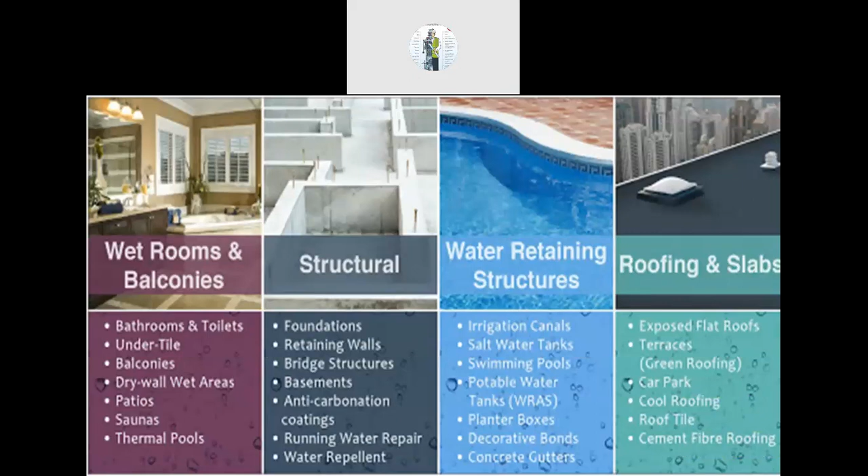Now, the first thing we need to know is what is waterproofing? Waterproofing is nothing but protecting the concrete or a building against the damaging action of water. Virtually any building envelope, particularly a below grade structure or a plaza, would encounter hydrostatic pressure from water during its lifetime. Therefore, a quality waterproofing system is very much essential to preserve the water tightness of the building envelope. Like Mr. Ashok Kumar has rightly told, waterproofing is a very important topic in the construction industry. So we are also talking to people to incorporate such presentations so that our fellow engineers as well as professionals would understand the need for waterproofing of a structure.

So why is water so important? Water is a carrier, the main carrier of corrosive agents. It participates in the chemical reaction. It damages the structure, the facility, and the installation. It also causes functional as well as structural damage to the structure. So yesterday we talked about the various effects of water on repair and rehabilitation.

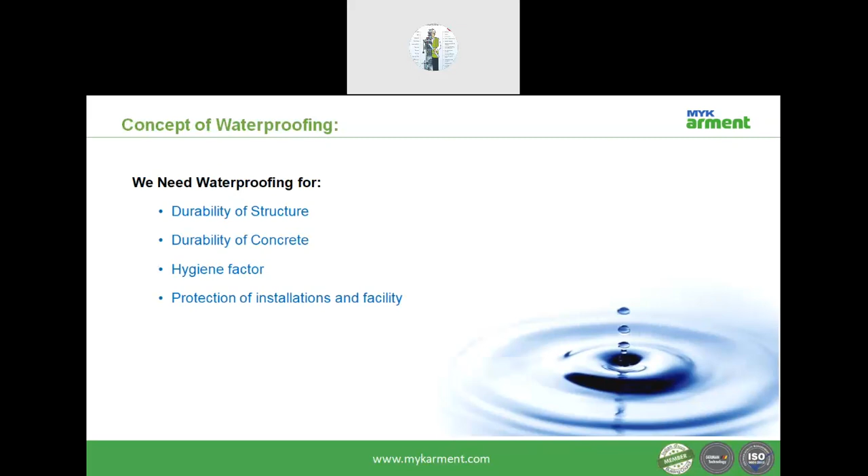What is the concept of waterproofing? Why do we need waterproofing? The need for waterproofing is for the durability of the structure, durability of concrete, hygiene factor, protection of installations and facilities.

So what are the causes? How does water enter into the structure? It is through cracks, through joints, porous media, might be capillaries, honeycombs, pores, and defects in the construction. Now there are different companies who would come to you all and talk about different kinds of products.

What is waterproofing? As we already know, it is a tendency of the material that keeps water away from the body under hydrostatic pressure.

Damp proofing is a system that resists water vapor or minor moisture, not subjected to weathering or water pressure. We need to be very clear on which system we are adopting, and that would also lead to catastrophic damage of a structure.

So we need to know a proper difference in the terminology of different kinds of waterproofing systems, and what system we are adopting in our project.

What are the different types of waterproofing systems based on chemicals? The main waterproofing systems are classified into preformed membranes, that is membrane systems, then liquid applied, and integral waterproofing systems. These waterproofing systems are subclassified into bituminous and non-bituminous, because in the old traditional technology people used to use bituminous based material.

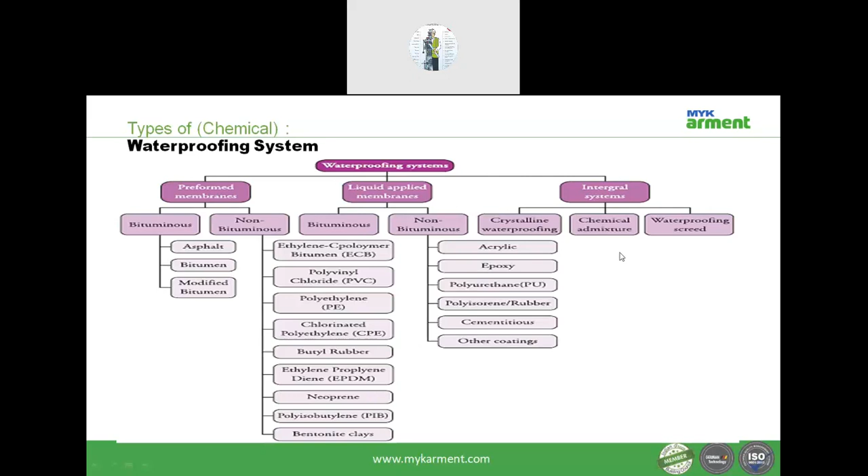Now, based on the chemistry, the waterproofing systems are classified into integral waterproofing, reactive kind of crystalline systems, bituminous based, and elastomeric polymer based waterproofing systems.

In today's presentation or webinar, I would talk about polyurethanes, polyurea, and hybrid polyurethanes, and I would also touch on preformed membranes with an HDPE membrane system.

Based on the chemistry, the waterproofing systems are also classified into bituminous, as I've already told. But what is the definition? People call it an APP or an SBS or a TPO based system, or an EPDM or MMA.

APP depends upon the chemistry. APP is nothing but atactic polypropylene. SBS is nothing but styrene butadiene styrene, TPO is thermoplastic olefin, EPDM is ethylene propylene diene monomer, and MMA is methyl methacrylate.

Depending upon the application systems, the waterproofing systems are also classified into brush applied, roller applied, and spray applied. Almost all of our cementitious based systems, as well as PU and polyurea based systems, also come under the brush, roller, and spray applied systems.

The hot weld kind of system is your APP, that is a tar felt system, and heat applied is a new technological trend in preformed membranes.

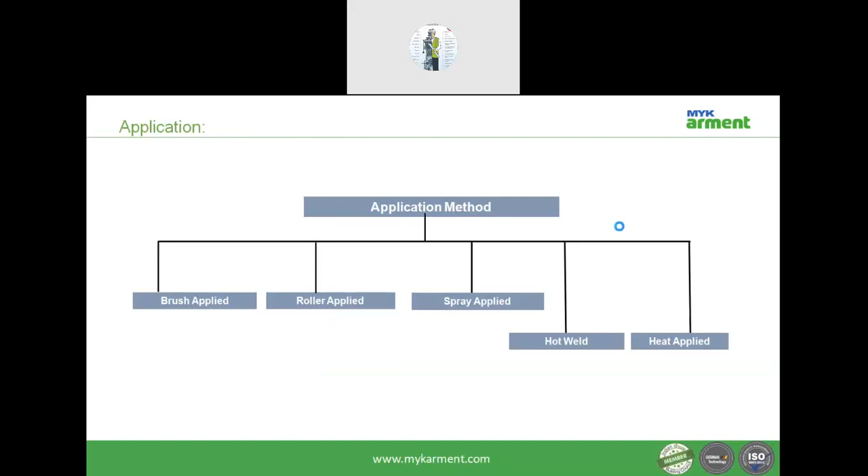So now if we talk about investment versus criticality, if you take the investment for any building, the total investment for waterproofing out of the total civil work investment is nothing but 0.6% of the total investment.

But the criticality of waterproofing, or the risk management associated with it, is tied to long-term maintenance cost. If you neglect this 0.6%, then the cost incurred for repair without a proper waterproofing system is approximately 20% of the total investment value. That is a very high value.

Therefore, a reliable waterproofing system is a must for overall project success.

I like this picture very well, because most of the time when we go to customers or to engineers in the contracts, costing, and estimate department, they always tell us that there would be somebody who does it cheaper. But that cheaper option would come at what cost?

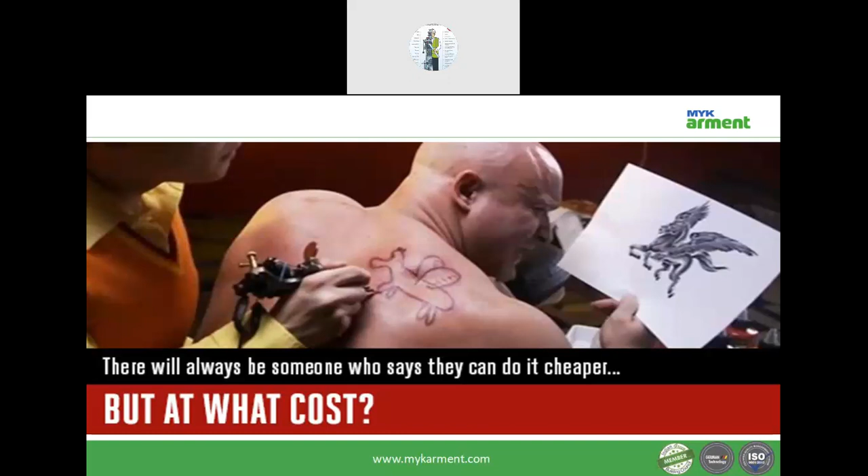That is what we need to know, and that is why it is very important to choose the right waterproofing system, which we will talk about in my next slides.

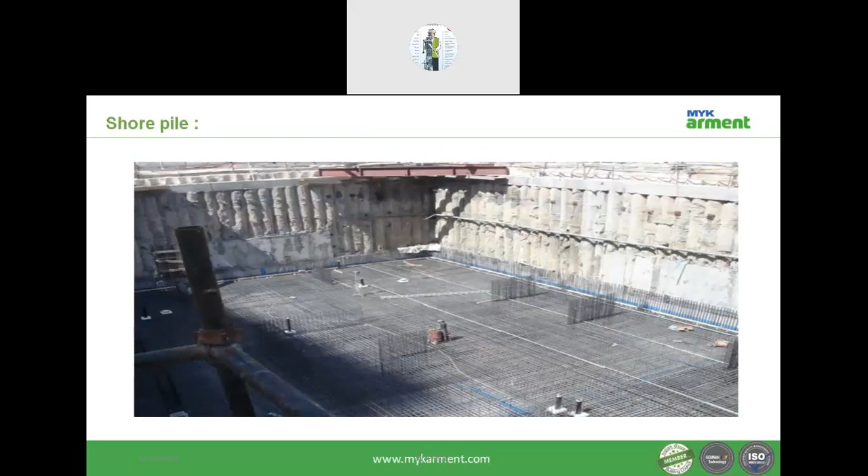Audible, yeah. It is an isolated foundation structure. Then we have the shore pile structure. We are showing all these different pictures of the foundation to make you understand the different kinds of foundation structures, because there is a need for different kinds of waterproofing intervention and systems to be carried out. So this is with a D-wall and a pile foundation structure.

And then for the retaining wall structure, also they require a different kind of waterproofing system. And with the basement and the rock anchor, where the water pressure is very high, in those areas we would talk about how to select a waterproofing system and what is the right system to be selected to prevent any water seepage in the basement.

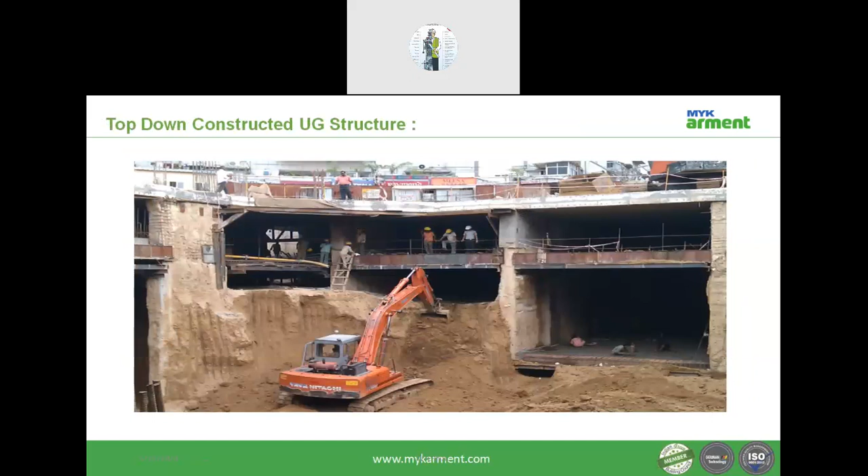And for a cut and cover structure, also the intervention of the waterproofing systems is much more different, even for the top-down constructed underground structures. We would talk about the basement structures, that is, we would talk on problems and defects, and we would talk about selection criteria and solutions, and on the best practices as well as the case studies.

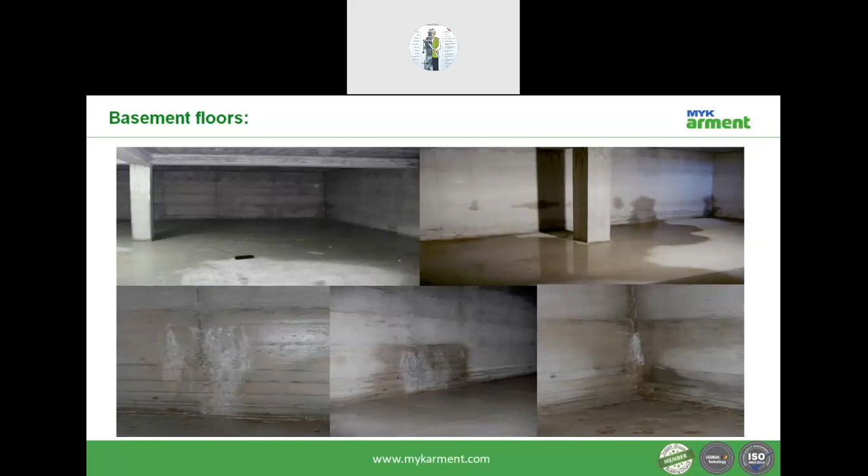So this is a basement, you see, in the retaining wall, because this is one of the projects where incidentally I have been in to give a solution to the customer. We already told the customer that there is a nearby water source, so you need a very good waterproofing solution for that, and there is a heavy chance that the groundwater would increase. But the customer did not hear us, and now he is spending more on the repair cost than the waterproofing cost he had paid.

And I want to know from the audience, is injection or pressure grouting a problem or a solution? You can even send a chat. Is pressure grouting a problem or a solution? Anybody? Yes, pressure grouting is a solution if you need it, it is a solution.

I could see somebody, Mr. Sandeep, telling that it is a solution. Yes, sometimes it is a solution, because without pressure grouting you cannot stop certain kinds of seepage that is happening. But it is a problem if you go on fixing nozzles at each and every interval, you are damaging the structure. Hence it is a problem. So we need to be very clear when we make this kind of intervention.

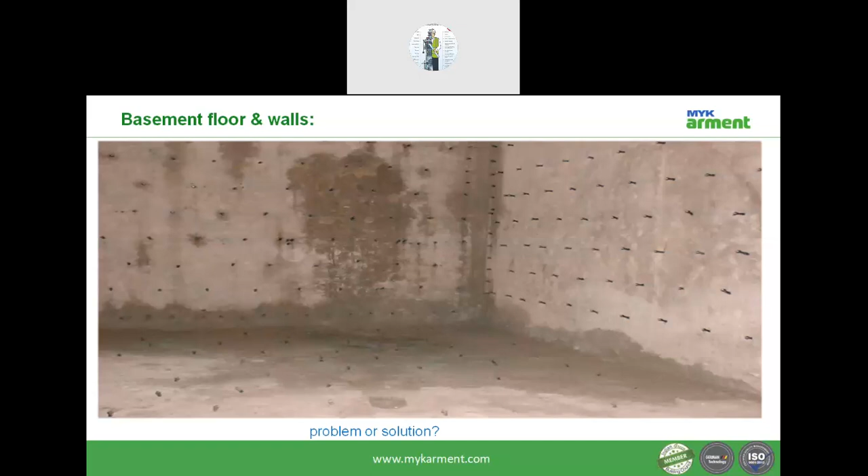Now in a basement, there are certain types of condensation also that take place, or mold. What is condensation? When hot air comes in contact with a cold surface, you have water condensing, that is called condensation, and due to continuous water you have mold formation, and that affects the hygiene and the environment.

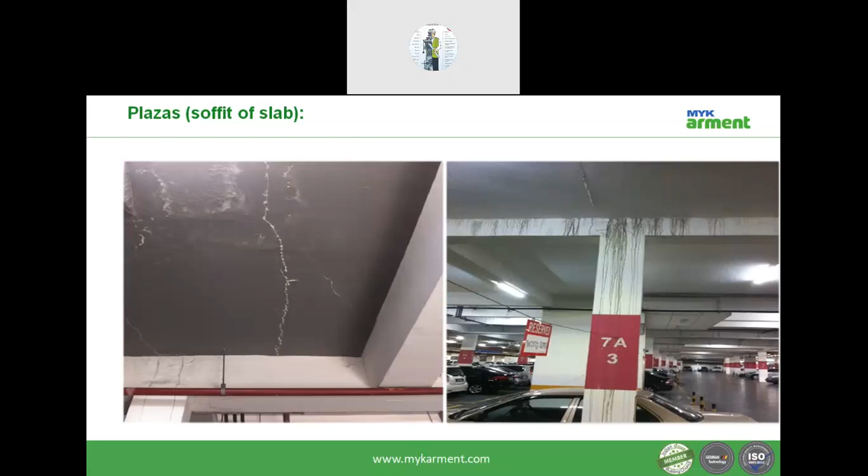This is what happens if you have a costly vehicle - the paint chips off. And in the picture you can see even in the car parking, the car is covered to prevent it from any further damage due to the water seepage.

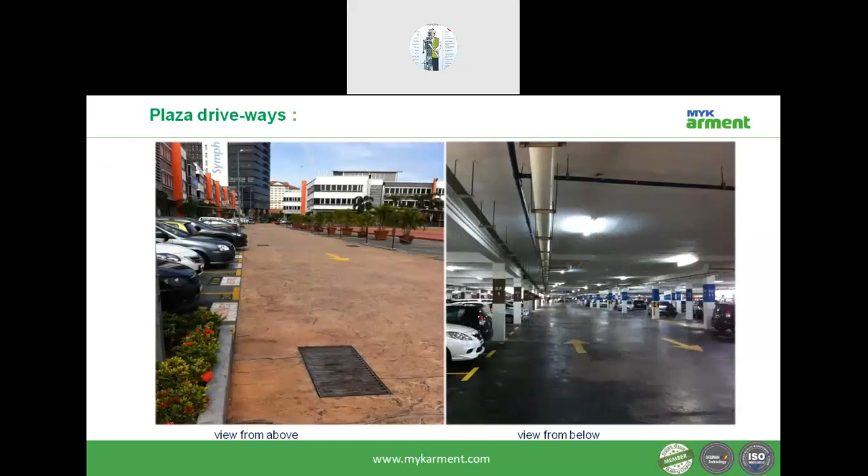Now this is a plaza below. You can see the water seepage, which is also aesthetically unpleasing and creates unhygienic conditions. Even in expansion joints in plazas or driveways, if the expansion joints are not properly done, or the surface waterproofing is not done, then you have an issue of water seeping in, which in turn reduces the lifetime and durability of the structure.

This is a driveway where the expansion joints are not treated, because expansion joints are very, very important - most projects we see find a lot of problems if the expansion joints are not treated properly.

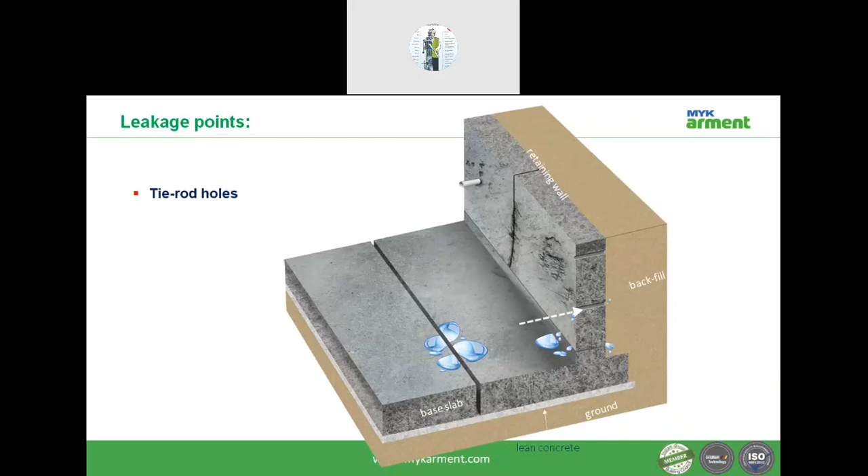What are the leakage points? The leakage points are through the construction joints. The construction joints have to be treated properly, and then you need to take up the expansion joints, which I've already spoken about, and then the tie rod hole fillings. If the tie rod holes are not filled properly, then you have the issue of water seeping in.

Then there are honeycomb areas, voids and cracks, either due to improper compaction, improper mix design, or improper curing - you get all these kinds of effects. Then the pipe penetrations also have to be sealed properly in the retaining wall structure.

And what is the solution? We have repair mortars to fill the voids as well as the infirmities in the concrete. For the joints, we have water bars that swell in the presence of water. For pipe sealants, we have swelling water sealants. For expansion joints, we have sealants and tapes. And we also have mortars for the repair.

Now first we need to understand how we select a waterproofing system for the basement. The waterproofing selection system is based on the water table and the depth of the structure below ground level - that is very, very important. We need to know the water table at that area and the depth of the structure below ground should also be known.

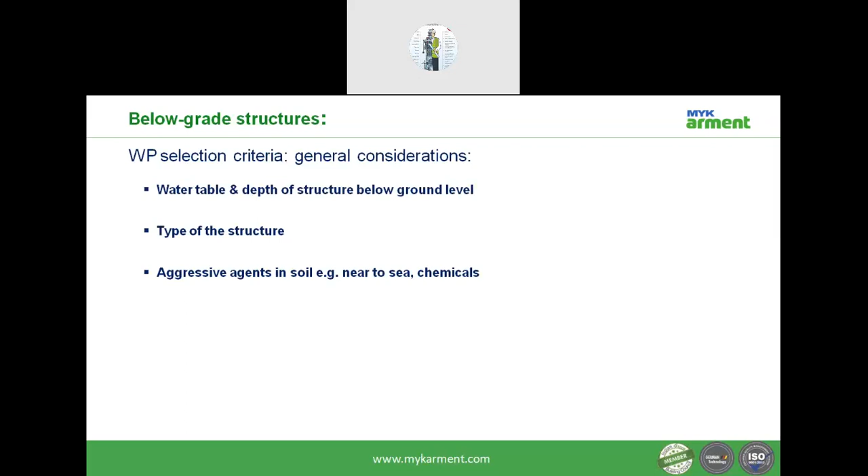Once that is known, you need to know the type of structure, what is the aggressive agent in the soil, whether it is near the sea, or there are chemicals present in the soil, or any pollutant. The waterproofing selection also depends upon the construction method, for example the retaining wall, the contiguous bore pile, or cast-in-situ cut and cover.

It also depends upon the accessibility for installation, because I cannot choose the same waterproofing system for cast-in-situ and precast construction, because in precast construction you have a lot of precast joints between the elements that has to be waterproofed properly, otherwise you have water seepage issues. You also need to choose the waterproofing system based on the ease of installation and the track record in that environmental condition.

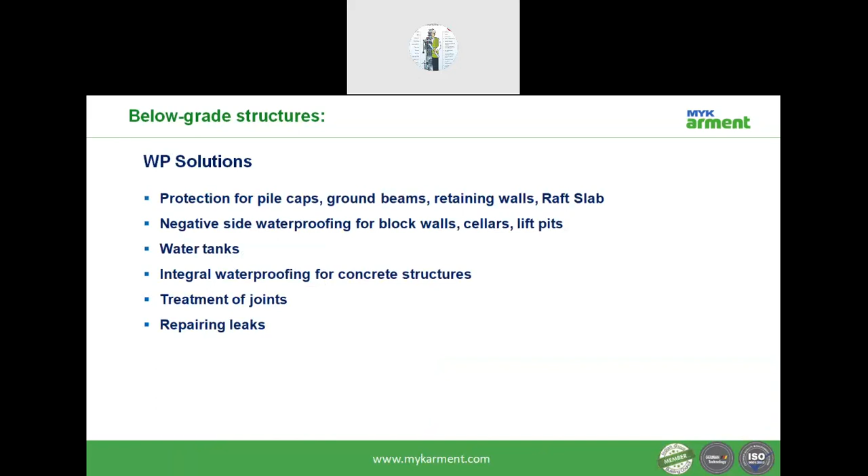So in a below grade structure, what needs to be protected? You need to protect the pile caps, the ground beams, the retaining walls, the raft slab. In negative side waterproofing, we do it for the block walls, the cellars, the lift, the water tank, and integral waterproofing. You also need to treat the joints as well as repair the cracks.

But the question might be, since we are pouring the concrete and the water is present, does the swelling water bar not swell at that time? That might be a question.

This is a PVA based water bar that does not swell immediately, and swelling takes place after 8 hours of continuous contact with water. The swelling capacity is reswellable, and the swelling capacity of this water bar is more than 800%.

I'll just show you a video of a water bar, how it is being placed.

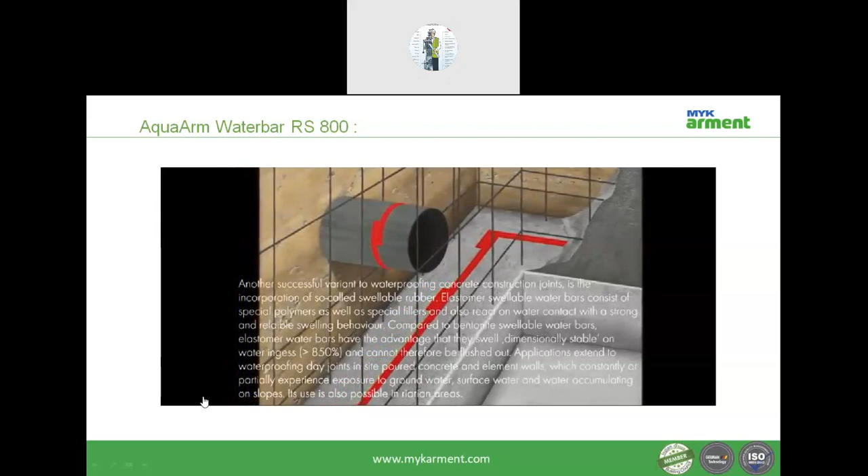The swelling of this water bar takes place in the continuous presence of water. Once the swelling stops when there is no further water present, it is a reswellable water bar. And this is how the water bars can be placed.

It can be placed on the joints using an adhesive, for blunt butt joints and overlapping joints, and even for corner connections.

We also have bentonite based water bars with us, so the principle is the same, but the chemicals here are bentonite based.

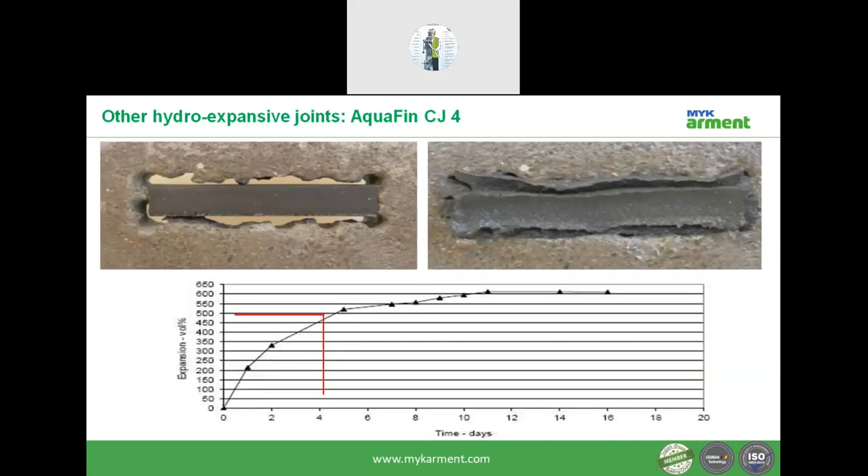You can see how the bentonite based water bar works. This is a small simulation where we have laid a water bar in a joint, and when there is continuous water pressure, it swells from more than its capacity and blocks the water.

If the width of the concrete is more than 300 mm, then you need to use 2 water bars. This has to be avoided: when you place a water bar on a wooden reap or something, in the presence of water it swells and breaks, and then the effect of the water bar would be compromised.

We have a system called AquaArm Power Prufe 800, which we call an HDPE membrane. This kind of HDPE membrane is a high technical product for below grade pre-applied waterproofing systems. It consists of 3 layers: an HDPE backing, the pressure sensitive adhesive, and the trafficable resistant protective coating.

In this kind of system, we can directly lay the concrete on the HDPE based membrane on the compacted PCC, and when the concrete gets bonded to the trafficable protective coating, the pressure sensitive gel gets released, and therefore it resists the lateral flow of water.

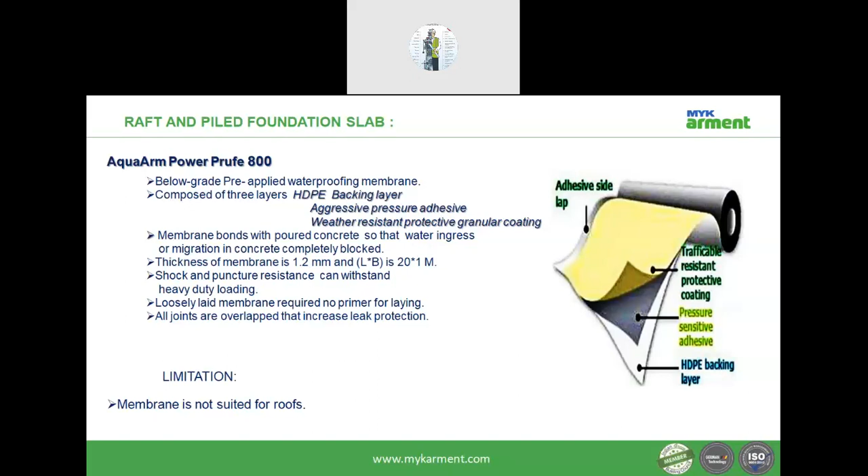The thickness of the membrane varies between 1.2 and 1.5. In other foreign countries, they use only the 1.5 thicker membrane, and this membrane is not suitable for the roof.

I'll just show you a video of how the application of an HDPE membrane takes place.

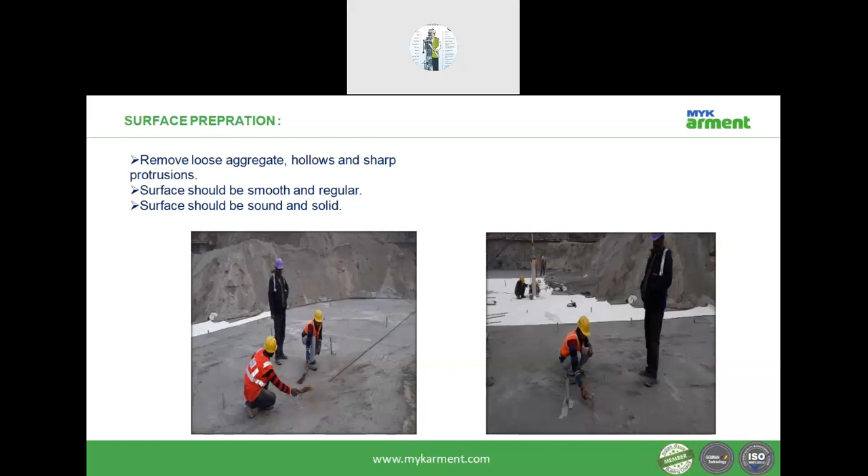This is about the surface preparation. There should be no sharp edges. The surface should be smooth and regular, and it should be sound and solid. Then it is a robust and trafficable material.

Once you lay this HDPE membrane, you can directly leave it exposed for 36 days, and then you can even lay the reinforcement because it has a higher puncture resistant property of more than 880 newtons.

But you need to take care that you don't drag the reinforcement on the HDPE membrane. You can see any kind of uncongested reinforcement can be directly laid.

The advantage with this system is that in other kinds of systems you need to go for a screed concrete for the protection of the waterproofing system, but with an HDPE membrane you can directly lay the raft concrete on top, and this also prevents the lateral flow of water.

It directly bonds to your raft concrete, and this is how the application works for the piles. Since you would be breaking the piles, the surface would not be clear, and the application with an HDPE membrane is very fast and very simple to apply.

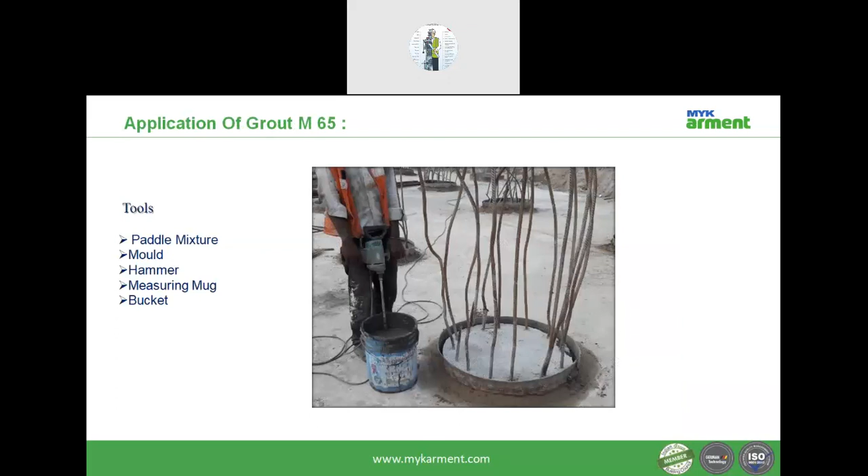Now for the pile top treatment, because the surface would not be proper, we use a micro concrete to make it a proper surface.

Once that is done, we use an epoxy based primer and epoxy grout, because the epoxy grout resists the capillary flow of water.

Then we can even terminate the HDPE membrane at each and every pressure release pipe, and then we can also use a PU based coating as a protection.

These HDPE membranes should be protected on the retaining wall with drain boards or dimple boards against any damage during soil fill. The drain boards also help to guide the water to the drain pipe.

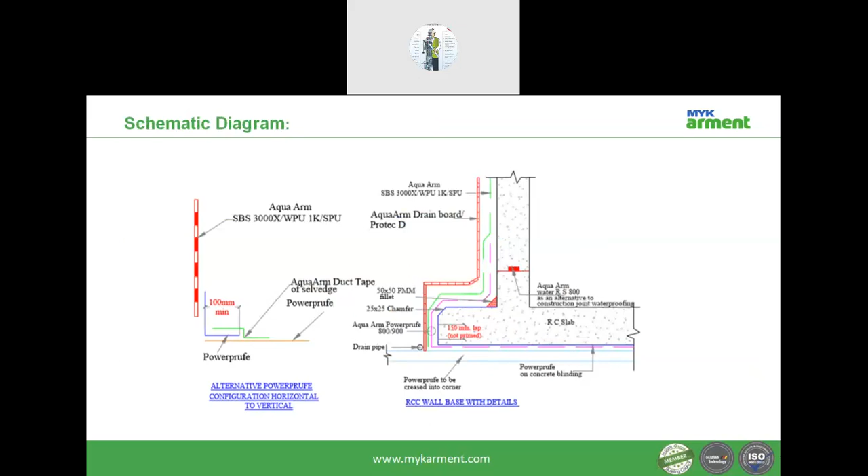Now we would talk about the waterproofing system for internal areas, such as balconies and swimming pools. Here also we talk about the problems and defects, the selection criteria, and the best practices.

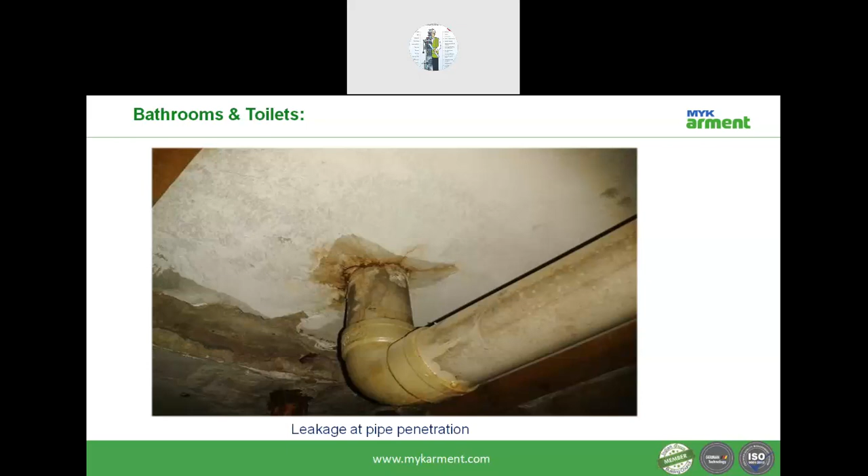This is one of the issues you see in waterproofing of a toilet. What happens is there is a leakage at the pipe penetration if the packing of the pipe is not done properly. This is also another issue you can see in most apartments in Bangalore or other regions across India.

If the waterproofing is not done properly, there is leakage from the bathroom corners because the proper gradient is not placed, so the water gets stagnated at that place. And if you have a bathtub, the improper sealant application or the deterioration of the sealant also causes seepage of water.

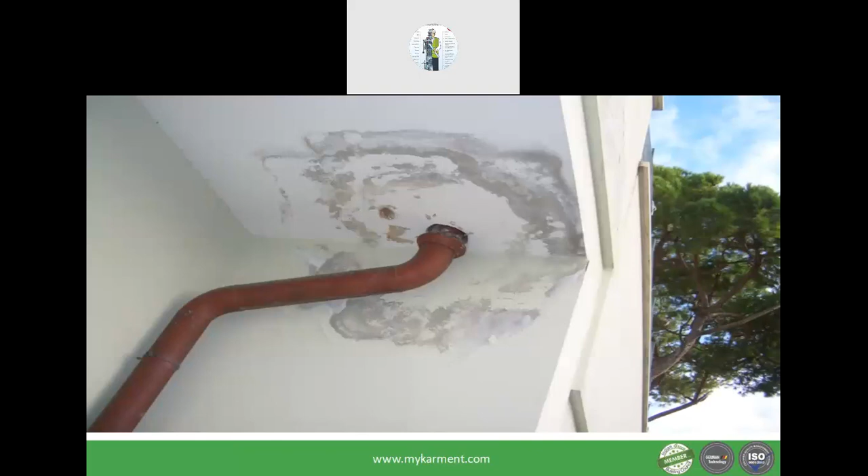This is one of the projects where in the balcony they did not even do any of the packing of the outlet pipes. You can see the water seeping through the outlet pipes.

This is what happens in certain projects where, because of the improper waterproofing system, you can see the moisture coming through, leading to leakage pipes or plumbing issues.

Then if water comes in or trickles down, you can see discoloration on the paint, or the peeling of the paint would take place.

And what is the waterproofing system we need to follow for the toilets or the wet areas? It should be a simple system for a confined area, because on all sides you have the beam as well as the slab, so the movement would be much lesser. You can use a rigid kind of waterproofing system here for toilet areas, as there would be less movement, but it also depends on the type of structure. For example, I cannot use a rigid-based waterproofing system for a precast system, which I'll talk about separately.

The waterproofing should be resistant to penetration of water as per BS standards or ASTM standards, and it should have good adhesion.

In pools and water features, it causes efflorescence in the pool, but in the bathroom and toilets we need to be very clear that we need to pre-wet the substrate, especially walls. Joint treatment has to be done for all construction joints, and the pipes and penetrations need to be taken care of.

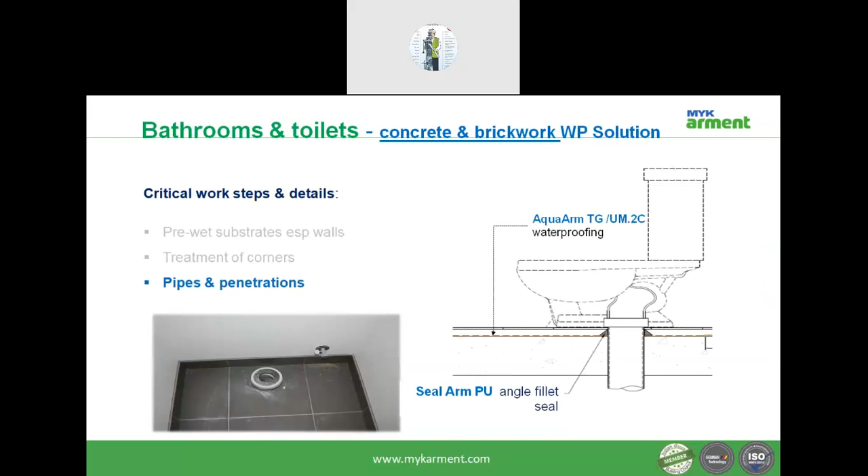So you can use a cementitious or sometimes a polyurethane-based waterproofing system. This is a system built up using a cementitious-based waterproofing system. For all joints you need to use a tape instead of going for a coving or haunch at the joint. Then you apply the cementitious-based system and directly the tile adhesive and tiling if it's a flat slab. If it's a sunken slab, you need to protect the waterproof coating with plaster, then fill up the sunken areas with cinder or screed, and then go for tiling.

So for swimming pool purposes, I will talk about that in the swimming pool section.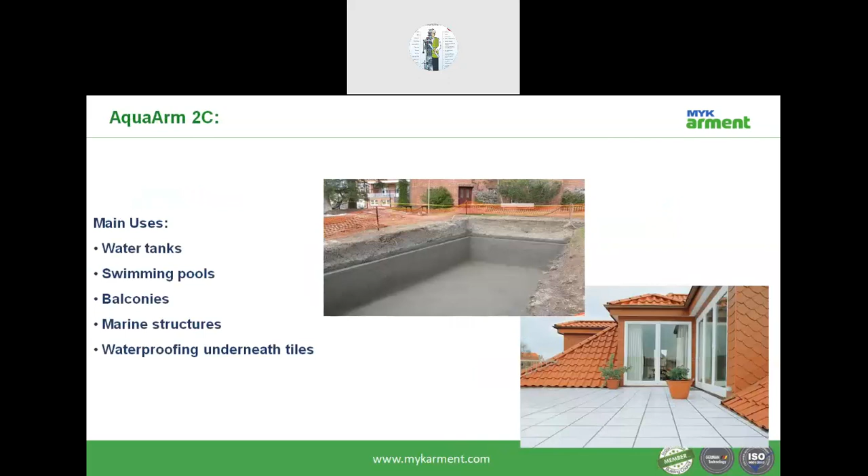Now we have a product called 2C, which is a cementitious-based system that has high elongation properties and can withstand hydrostatic pressure. This is a cementitious system which I can use for water tanks, swimming pools, balconies, marine structures, and waterproofing under tile.

Now we have a product called Aqua Arm Saniflex, which is a synthetic resin-based dispersion, a single component system that can be applied on plaster or gypsum board, or even on marine plywood, with a thixotropic consistency, and on existing ceramic tiles, natural stones, cement, untreated wood, and magnesite substrates.

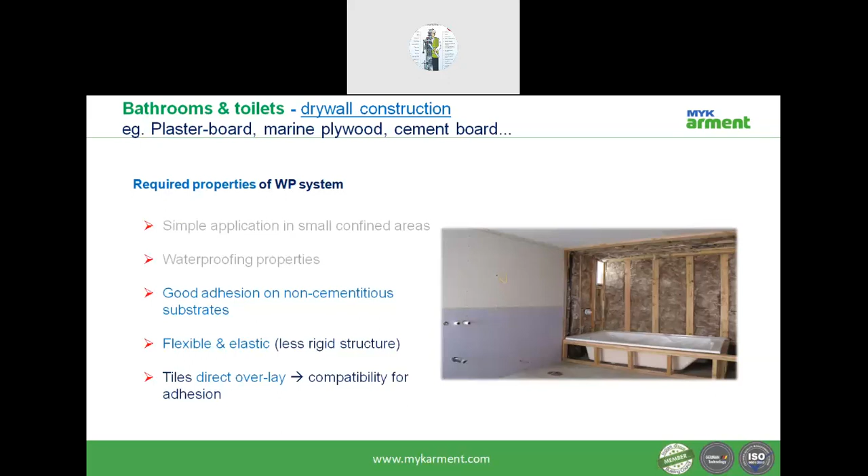In hotel industries, they often go for plaster boards or gypsum boards as partition boards. For that kind of system, the waterproofing system we need should be very simple. It should have good adhesion on non-cementitious substrates also, and it should be flexible and elastic with less rigidity, so we can directly lay the tile on the surface.

The product we have, Saniflex, has more than 114% elongation, and this is how the application takes place. First we need to clean the surface, then apply a single component primer, then all joints have to be treated with joint tape, and then we apply the synthetic resin-based coating, with the tapes embedded in the synthetic resin-based system.

Where the construction process would be much faster in the precast system. Yes, then this is about the Aqua Arms.

You can share the earlier slide. Regarding the pod, people may not know what a pod is, so if you explain it a little, they will understand. A pod is a precast element. These precast elements are fixed in the factory itself, and then they bring it to the site and install it there. This is precast, but the pod is nothing but a precast toilet or bathroom kind of structure.

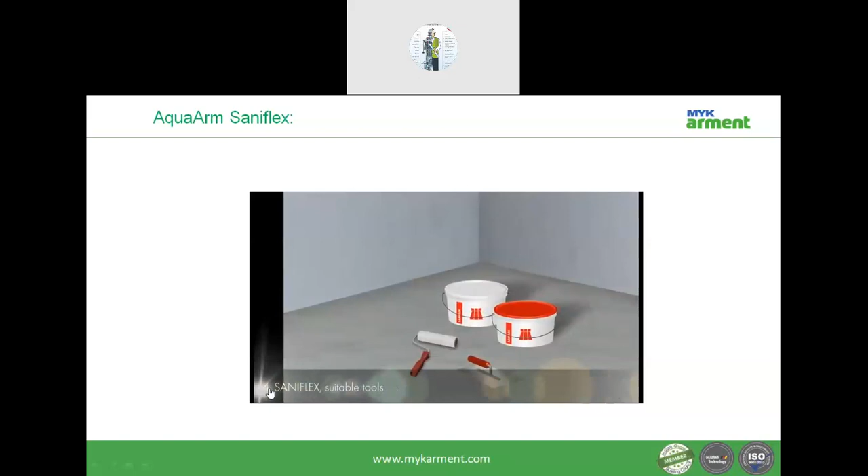This is a video about the AquaArm Saniflex. Their application using Aqua Arms Saniflex is much faster, and you can directly lay the tile on top of this waterproofing single component material.

This is a joint tape. In all construction projects of waterproofing, people use coving at the joint. But what happens is, when the coving is done and the waterproofing is totally completed, the tile layer comes and tries to fix the tile with a proper level. When he does not get a proper level, for example if the coving is something like 50mm and there is no proper level, he chips that joint and lays the tile. Once the customer occupies the building and starts using the available resources, there is a high chance of water seepage, which leads to repair, and the repair cost would be much higher.

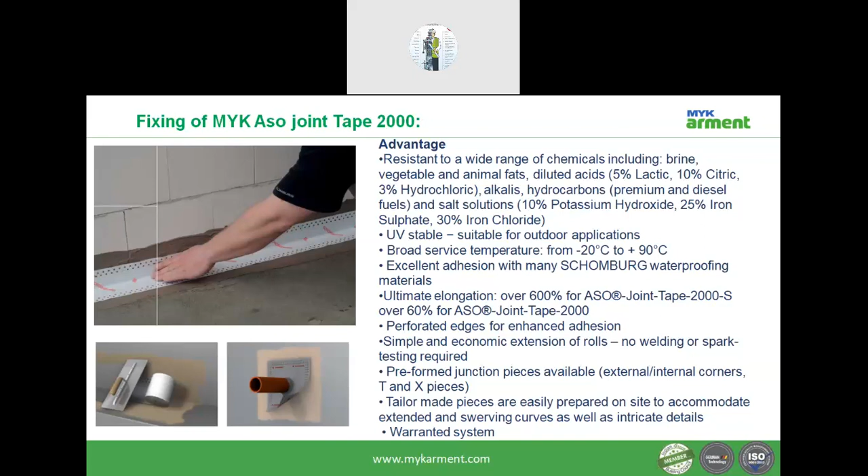To overcome that, we have a joint tape. This joint tape has an ultimate elongation of more than 600%, and a high tensile strength of more than 3 newtons per millimeter square. These kinds of tapes are also used for preformed junctions, and it is a tailor-made piece that is easily prepared on site to accommodate extended and swerving curves, as well as intricate details. So this is what the tape sizes are, and we can cut and design it for any change of direction.

This is the application of the tape on the retaining wall. This kind of tape can be embedded with the cementitious or the single component resinous based coating system. Then we have below grade structural tapes.

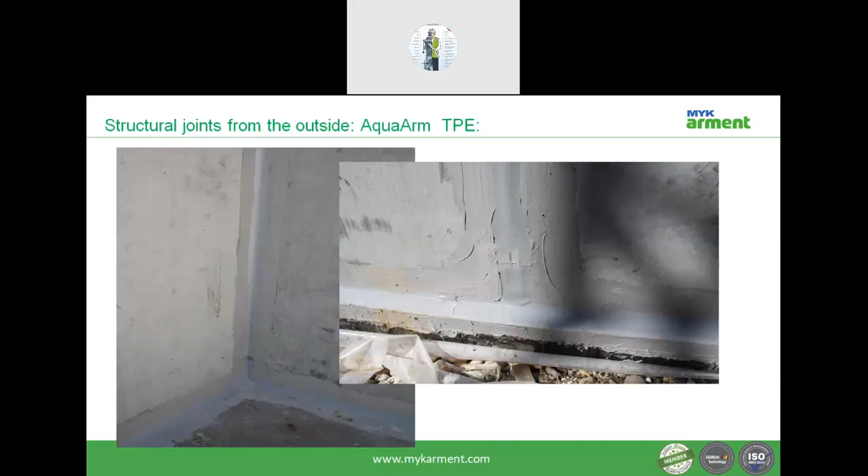That is a joint tape, called an elastomeric thermoplastic olefin based tape, used for basement and tunneling works, and for hydraulic structures and water. This tape has a higher elongation of greater than 650%. These kinds of tapes are used at structural joints, and even in precast segment joints of a particular length, we use this tape. So this tape prevents the entry of water. This tape is chemical resistant, it is also root resistant, and it has higher puncture resistant properties.

The same tapes have been used for expansion joint works also. This is one project where the size of the expansion joint was more than 150mm, so we have a tape of 1 meter by 20 meters that can be used for various sizes of joint widths in seismic joints, because most structures now are designed in the form of seismic joints. Why? Because if there is any natural disaster or earthquake, the structure should not fall apart from each other.

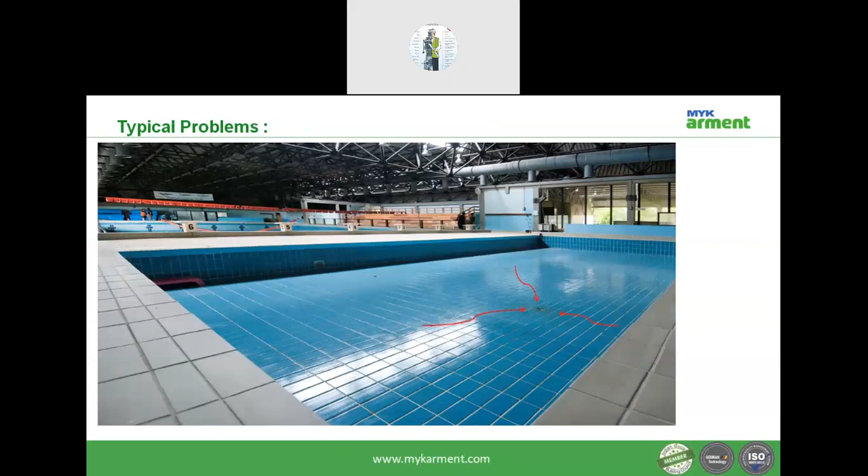In a swimming pool, what is the requirement? The coating should be crack bridging, static and dynamic, with good waterproofing properties, and should be compatible for tile overlay applications.

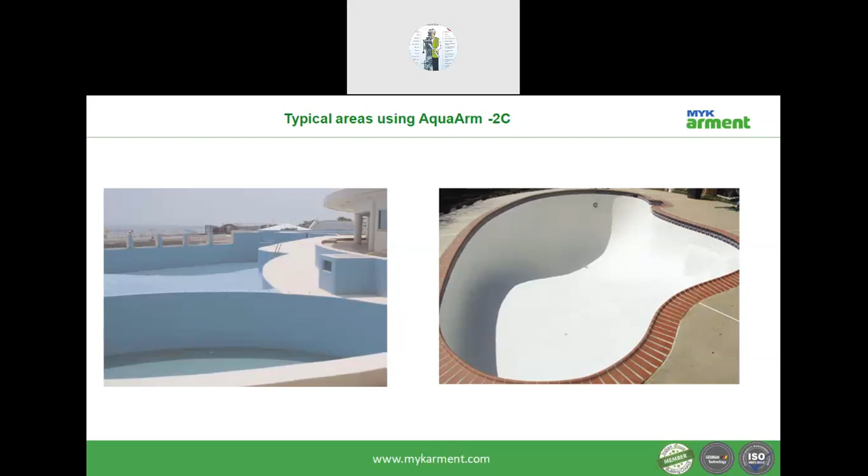This is how the swimming pool is done, because we have a product called AquaArm-2C that comes in 4 different colors - white, gray, green, and blue. We can give you the product in different colors.

We would next talk about the roof and decks. Even in roof and deck, we would first talk about the problems and defects, the types of roofs and system criteria, and the best practice. Why are we emphasizing more on problems and defects as well as system criteria? This is very important, because when we know the problems, then we can give a proper solution as well as the system criteria, and it will also help you choose the right waterproofing system.

In a roof, what happens? You can see the waterproofing materials are deteriorated from exposure to weathering. If you use a cementitious based coating, some of these coatings are not UV resistant. When applied on the terrace and exposed to thermal effect as well as UV, they deteriorate and come off the substrate, losing their bond strength. You can see the picture to my right below - a different kind of waterproofing system that has totally peeled off. Now you cannot see any waterproofing system at all.

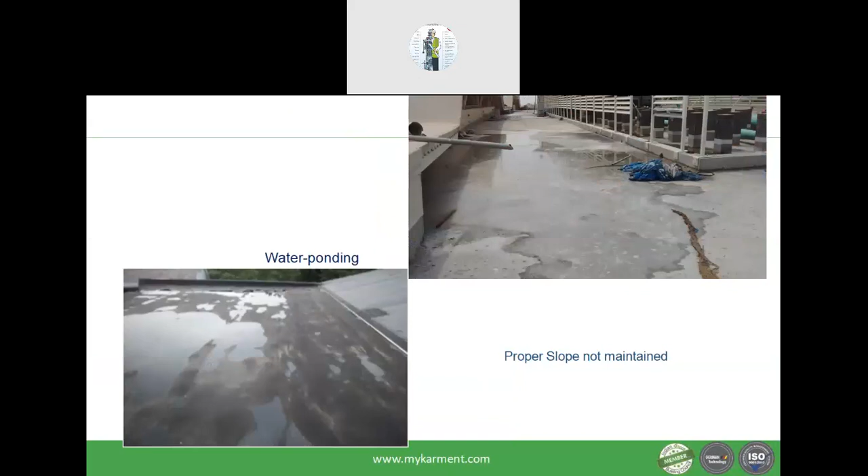What is the problem in a roof is that there is no proper slope maintained, or continuous water ponding takes place because of improper provision of the outlet as well as improper slope maintenance. Then there is poor adhesion and termination. Sometimes, if waterproofing agencies are not technically clear about a certain kind of waterproofing system, they do such a nasty, negligent job that compromises the quality system.

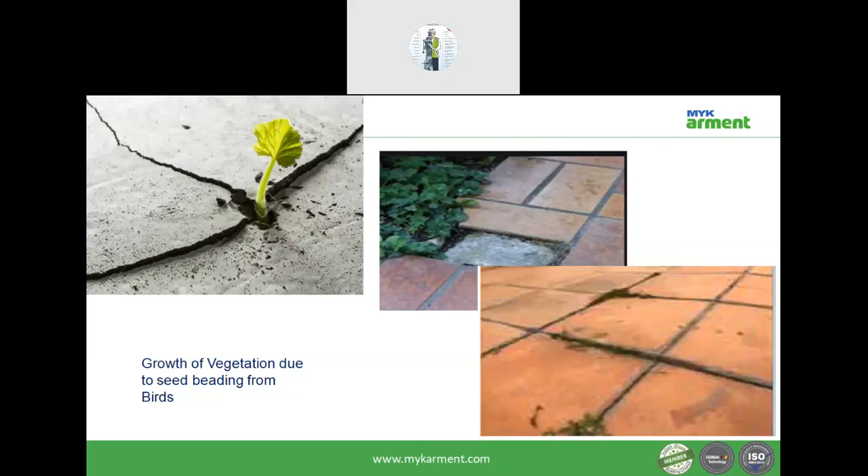Sometimes, if the surface is not prepared properly or maintenance is not done properly, then because of the feeding effect of birds, they drop seeds that grow on your terrace. When their roots try to penetrate in, there is a high chance that a crack develops.

This is another problem we see most of the time - because of deteriorated expansion joints, some people use some kind of sealant at the joints without any protection, then apply cementitious coating on top, and after some time they disintegrate and peel off from the surface.

This is another problem - if EPDM has been used, these are failures because of damage, because the EPDM lap joints open up, and that becomes the source of water seepage. Then you have a lot of water seepage on the slab, and you will never know from where the water is seeping in.

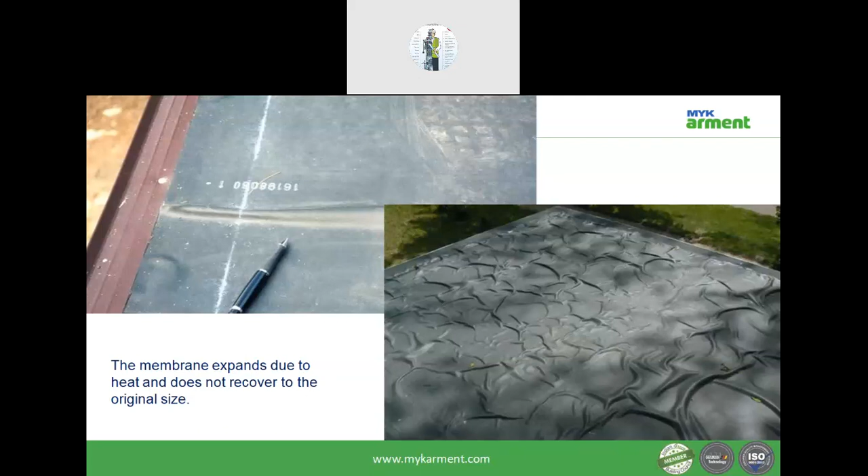This is another typical example - if the membrane expands due to heat and does not recover, this is because of improper selection of the waterproofing system. Due to the thermal effect, it wrinkles.

This is one of the projects we visited, where APP membranes have been placed. You can see the torch application of an APP membrane where they have heated it very much.

There is too much torching, the membrane thickness is not maintained, and it's executed by an untrained applicator without proper tools and tackles. The environmental conditions are strict because of use of an APP membrane, and removal of the APP is also becoming very difficult, with too much work and a lot of joints involved.

Because of too much jointing, people now go for a seamless coating system. This is one project where the applicator applied an HDPE membrane directly on the uncleaned surface, so there is no proper bonding. Because of no proper bonding, it gets debonded from the surface, and when you use an HDPE membrane, you have a lot of fire hazard problems. That is very important to keep in mind.

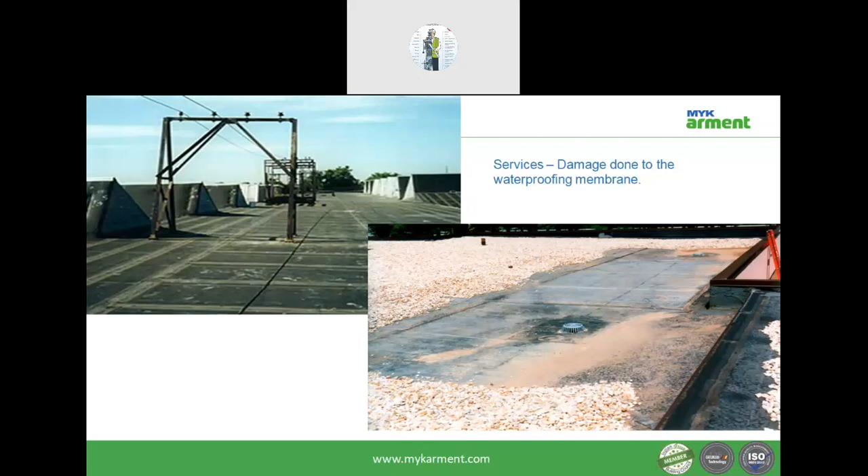When there is a service issue or damage to waterproofing membranes, this is what takes place when there is a lot of movement on any kind of waterproofing membrane. This is one project we visited where HDPE polypropylene based tar felts have been placed, and you can see that because of continuous exposure, it has deteriorated. Now the cracks on the slab - this is one project that is 30 years old.

You can see the cracks on this slab, and sometimes improper sealing of joints happens because of improper maintenance. Because of improper sealing of joints, or no proper outlet, water stagnates, which causes seepage later on. You can see the deteriorated tile grouts between the tiles, and water enters through these joints and starts leaking from the cracks and the masonry wall. Now, most people go for brickbat coba.

The brickbat coba has an improper slope, and most people say it is waterproofing - no, it is not waterproofing, it is slope making. Some people also say it has better insulation properties, but the insulation properties of brickbat coba are less than 1.

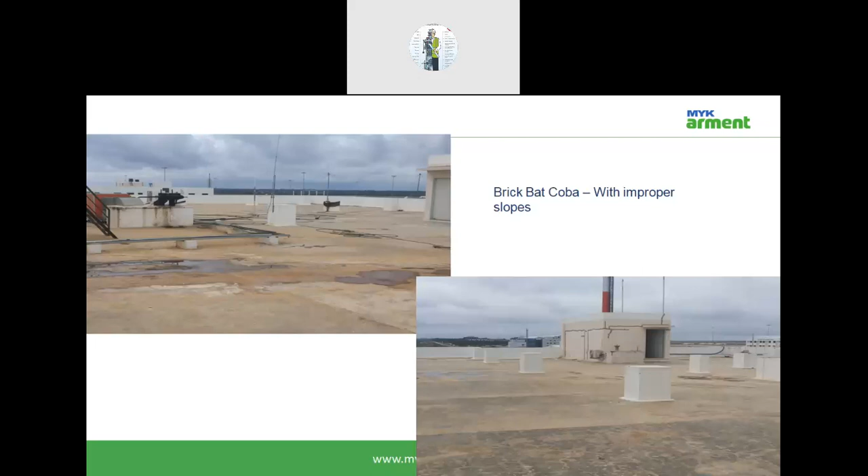This is what happens - the deterioration of this slurry. In a brickbat coba laid surface, they go for a small render on top, and when it's exposed to sunlight, it chips off or cracks develop, and because of that, water starts seeping through. This is the improper level through the outlet, or less number of outlets have been provided, and this also causes water seepage due to water logging.

This is one typical project, an industry, where water starts seeping through, and you can see the conditions of the employees working there. There are many kinds of costly equipment available. If you think of a single drop of water, then think about the condition of the employees who are working there.

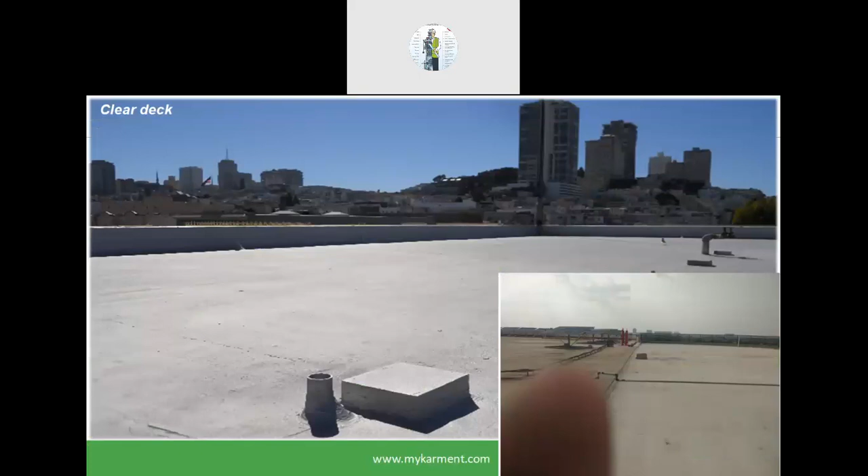To prevent all these things, you require a good waterproofing system. What are the decks in the roof? It is called a clear deck - you do not have anything on top, and then we have service installations.

You have AC ducts, or installation ducts on the terrace of certain kinds of industrial projects. Then we have recreation decks, because most people like to be close to nature and want a different kind of recreation terrace deck. This has become very important after COVID, because plant decks and roof gardens have become more and more visible in most houses. I think it also comes under green building conditions.

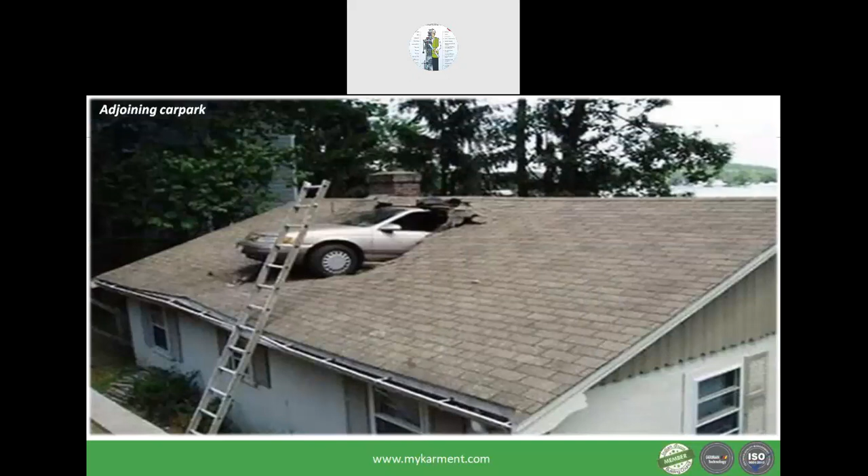Then, waterproofing systems are also very important for parking decks. This is what happens when you have a parking deck nearby your house - this is what happened in the adjoining area of a parking structure.

Now we have various kinds of products for terraces - preformed membranes, liquid applied, acrylic, polyurethane, PVC, polyurea, cementitious, and bituminous based. What is the selection criteria? The selection criteria is based on weathering and exposure to UV.

So what options do we have? We need to select the criteria depending upon the surface or different kinds of waterproofing systems.

Which one are we adopting? Is it an exposed surface or a concealed system? Or if it is a weathering system, is it exposed or concealed? Mainly the concealed system would be for pedestrian vehicular traffic, or aesthetic, or functional purposes.

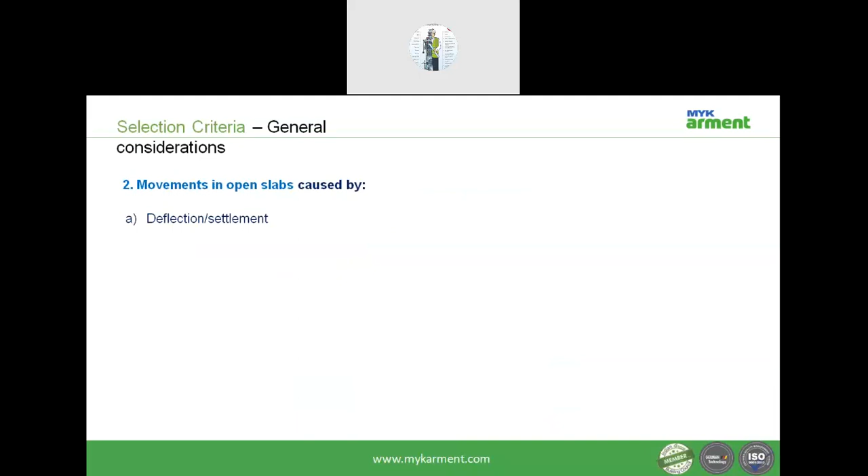Now, what happens is movement in a slab - we also need to consider deflection or settlement, or the temperature gradient changes that take place, or due to thermal shock. Depending upon the kind, we need to select different kinds of waterproofing systems.

What is it that we need to select? We need to select the waterproofing system based on the crack bridging ability of that product. Why crack bridging ability?

When stress is applied, there would be formation of cracks - the opening up of pre-existing micro cracks takes place. Therefore, your waterproofing system should be flexible as well as stretchable.

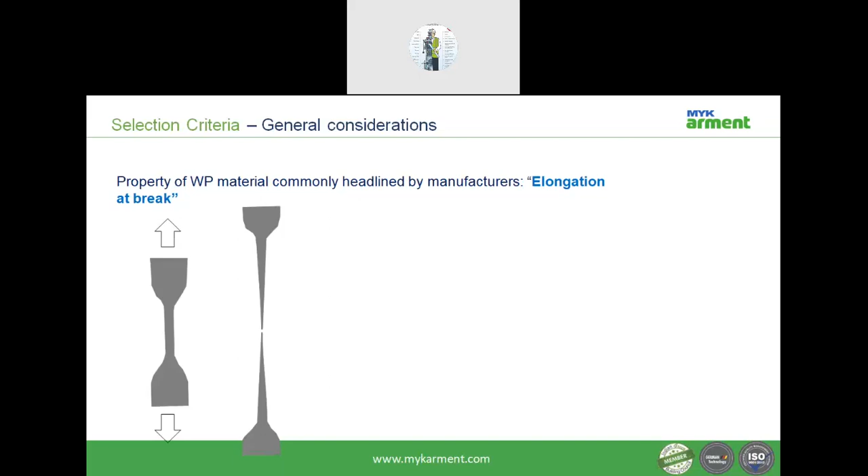Now, the property of waterproofing commonly quoted by manufacturers is elongation at break. I'll give you a question: which system would you select? Do you select a material A with 500% elongation, or a material B with 200% elongation? Which is the better material? Can anybody answer me? Which one would you select - material A or material B?

Please drop your answer down in the chat box.

Very good, most of them are answering the right question with the right answers. Because why? During thermal stresses, which cause the movement of the slab to fluctuate according to temperature, cracks open up and close repeatedly.

Therefore, over the expected service life, the crack bridging ability of the waterproofing system has to be seen. Because most of the time when we go to customers, they tell us that brand X has given them 1000% elongation. I ask them, why do you require 1000% elongation material?

Because our concrete is a low modulus material, right? What is the reason why you require it? But what we, as fellow engineers or professionals, need to see is the crack bridging ability of the material.

Why? Because it is not only the ability of the material to elongate, but also to recover to its original length when the stress is removed - that is, under repeated cycles.

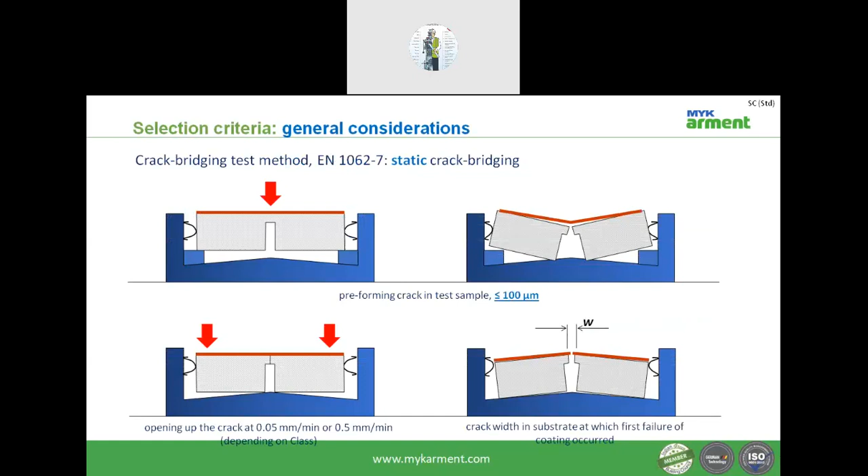Therefore, EN 1062 part 7 talks about static crack bridging properties and dynamic crack bridging properties under different kinds of loading conditions.

So the crack classifications as per EN 1062, in terms of crack bridging properties - if you take an MYK Arment product, all the TDS will show it falls in the range of A5 or A4. That means it can handle crack widths up to 2.5 mm.

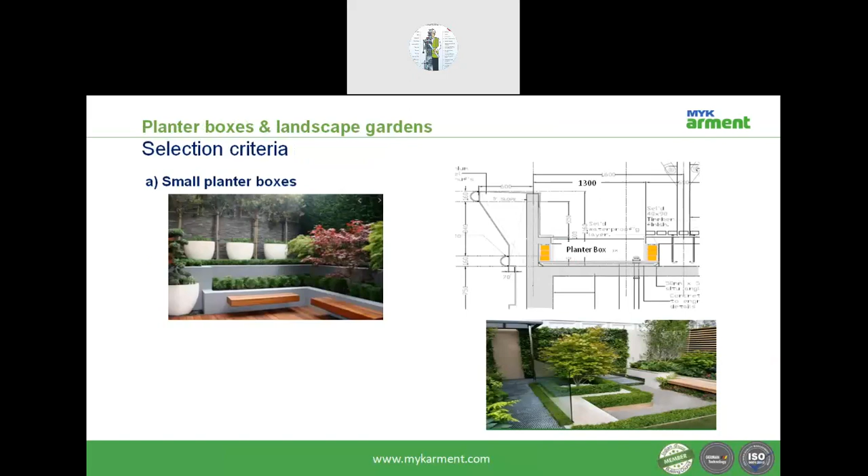Next, we talk about planter box waterproofing. In a small planter box or a large planter box, what kind of waterproofing system do we need? If we are growing trees in the planter box, what happens? The roots travel in and cause damage to the concrete.

If there is a small planter box with small plants, you can use a cementitious based system. If it is a larger one, you need to use anti-root resistant materials. And this is what happens if proper waterproofing selection is not done.

Because in most projects we see, even in podiums or landscape areas, they go for a cementitious based waterproofing system. But a cementitious based system has its own limitations depending upon the application area.

Any cementitious based waterproofing system is much more limited - the area limitation is something less than 500 square meters only.

Now, if the podium slab is more than 10,000 square meters, they still use a cementitious waterproofing system. Within 2-3 years, they find issues, and then they end up spending a high amount of cost.

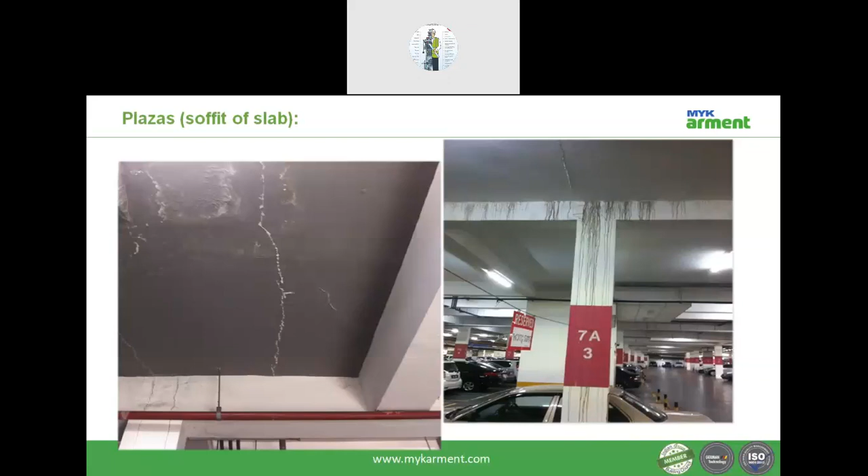What are the selection criteria for a planter box? First, you need to select depending upon the type and degree of root resistance, if any. The system build-up should include a drainage layer or a separation layer.

Drainage layer is nothing but where dimple boards have been placed. Generally the selection criteria depends upon the immersion, chemicals, and microbiological growth. For large areas, you require crack resistant based material. If it is a podium of more than 1,000 square meters, also you use a cementitious material. If it is a small toilet of 100 square meters, also you use a cementitious material. But we need to be very clear about the selection criteria for the different kinds of waterproofing systems.

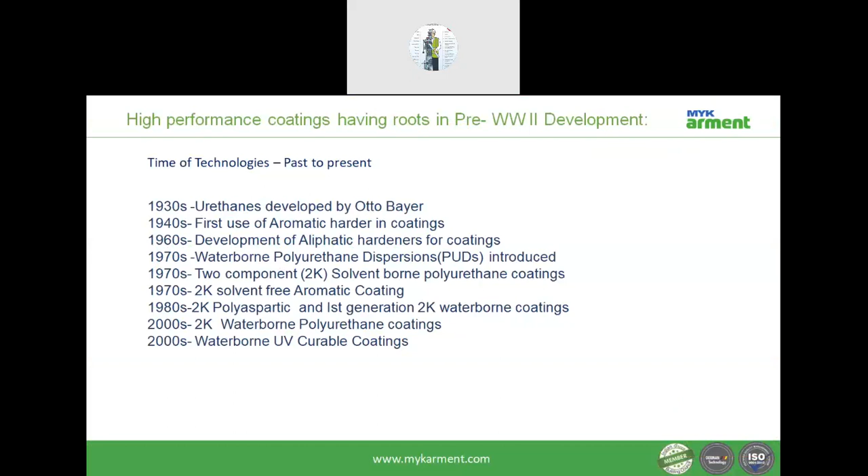Now we talk about the polyurethane based coatings. The polyurethane based coatings were developed by Otto Bayer, who is also called the father of polyurethanes. There were various developments with polyurethanes: waterborne polyurethanes, two component polyurethanes, polyaspartic and waterborne systems. What are these polyurethanes? Polyurethane is a reaction between isocyanate and polyols with a catalyst that gives high flexibility. These polyurethanes are classified into pitch modified polyurethanes, water based polyurethanes, solvent based polyurethanes, and pure polyurethanes.

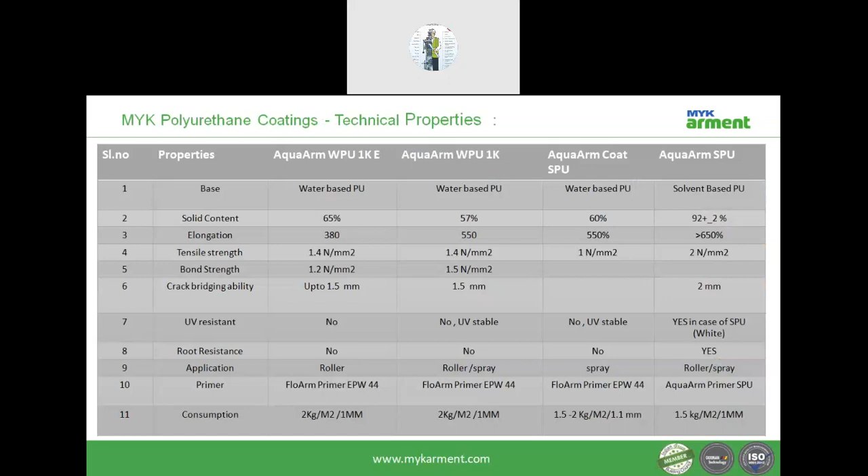Why water-based polyurethane? Because water is green, and water-based coatings have got even less than 0 to 15 grams per liter - that is VOC-free material. That's the reason it is a green product. So we go for water-based polyurethane, and this is how the reaction takes place. Polyurethane in presence of air dries to form a polyurethane coating. It is a green product.

What are the areas you can apply the polyurethane coating? For concrete protection, the podium, the complex roof, the planter box, or any kind of area you can apply the polyurethane based coating. This is the system build-up: first is surface preparation, then you need to apply a suitable primer and then the polyurethane coating. This is the system build-up for the retaining wall waterproofing systems.

You need to do proper surface preparation. You need to treat all the infirmities in the concrete, and then apply a primer and the polyurethane based coating system, and then the protection system with the drain board or dimple board. This drain board or dimple board helps in preventing any damage to the coating against the backfill, as well as guiding the water to the drain pipe.

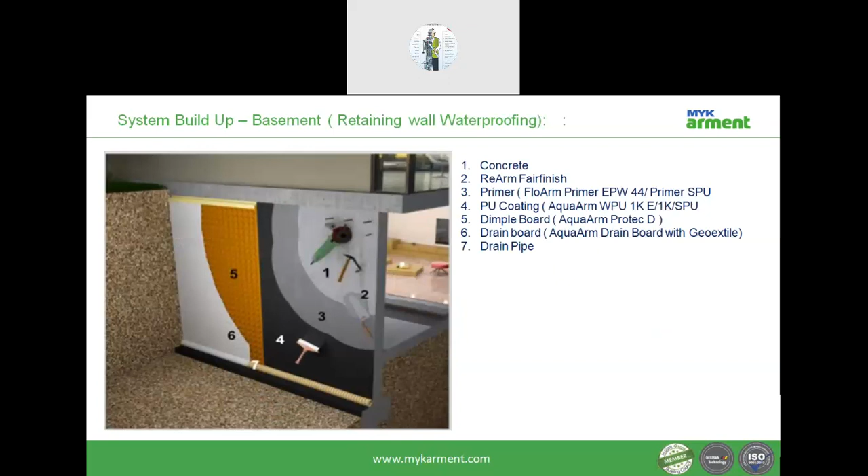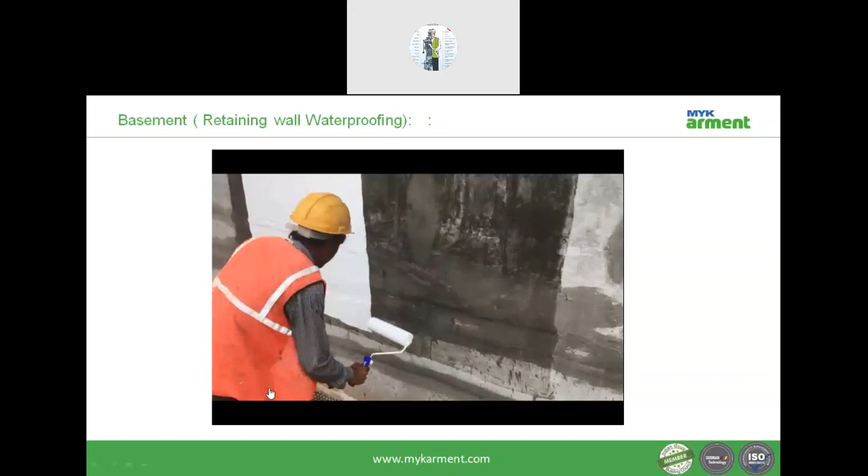This is a small video of a polyurethane based waterproofing system used for the retaining wall waterproofing system. You can see once the primer is applied, a person is coating the surface with the polyurethane based waterproofing system. You can see all the joints have been treated, and the tie rod holes have been treated properly. Then the primer is applied, and he's applying the polyurethane based waterproofing system in 2 coats.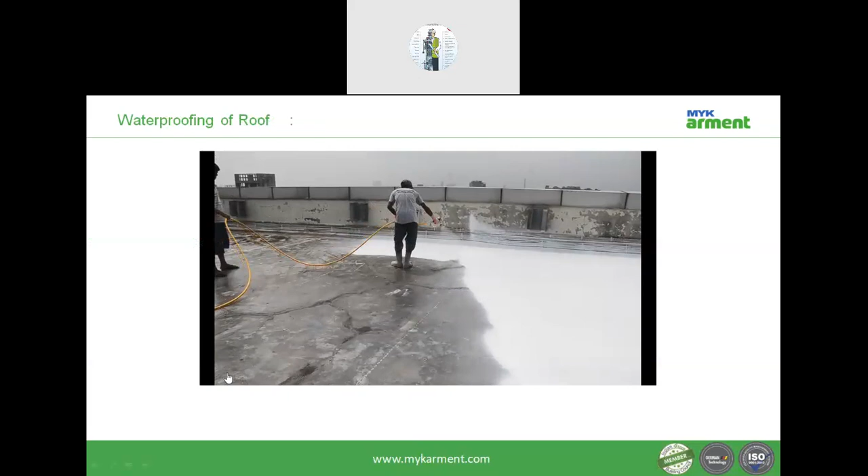Our polyurethane coatings can be sprayed. Your work would be much faster than this roller applied system. You can complete a large area per day - something like 300 to 400 square meters.

This is one of the projects where you can see there are cracks on the screed. The screed cracks have been treated, and then it is applied with a polyurethane based coating system using a spray applied pump.

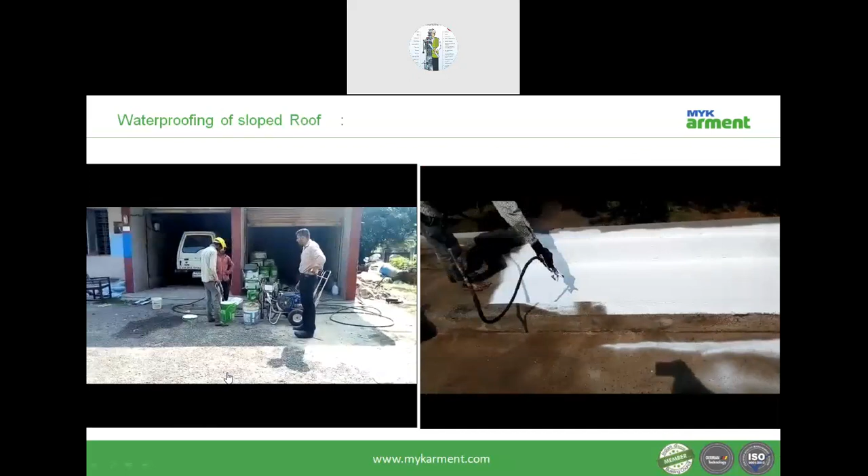And this is for an inclined roof slab where the polyurethane coatings are applied on the inclined roof, which is a 30 year old building, an NCC house, where the polyurethane based coating systems have been applied for the protection of the concrete structure.

You can see here the mixing as well as the equipment that has been used to spray this polyurethane based coating system. When you spray the polyurethane based coating system, it gives you much more and higher advantage, and you can cover a large area.

This is our solvent based polyurethane based system, which has got a high solid content, and you can see how flexible the material is. This is the flexibility of the material, which has got high crack bridging properties of more than 2mm, and it comes in the range of A5 of EN 1062. You can see how flexible the material is. It has got high crack bridging abilities, and it has an excellent bond to the substrate.

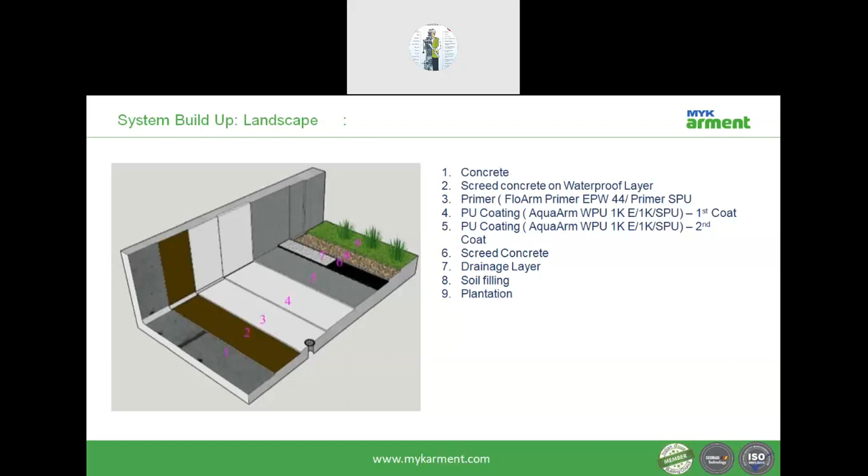This is for the green roofing, where you can use a drainage layer, then soil filling and plantation on the top, so that this waterproofing system has better thermal stress resistance as well as crack bridging ability.

We can go for surface grinding, which is the most used system. At certain places they also use shot blasting to remove the damaged concrete and give a better surface. Now, the reason for coating failure: 80% is more on surface preparation, 15% on application issues, 5% on wrong material selection.

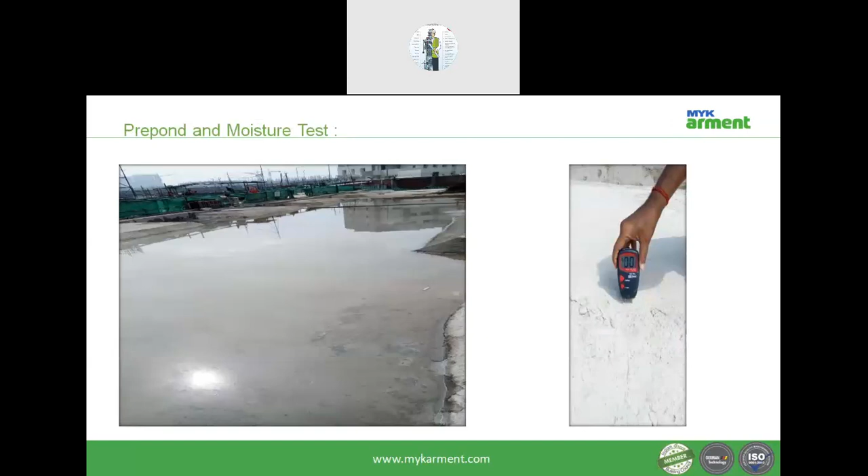Now, in a podium or terrace, you need to pre-pond the surface and test for any cracks or seepage. Then you need to go for pressure grouting or an intervention. Check the moisture; when the moisture is less than 5%, then you can apply the polyurethane based systems.

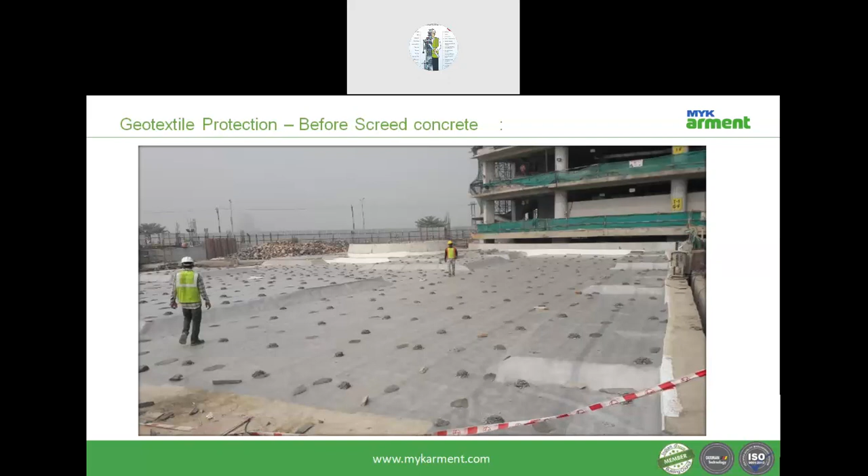Next, we will talk about polyurea coating and PU foam. So what is this polyurea? Polyurea is a 2-component spray applied membrane based on specially developed advanced polyurea chemistry, and AquaArm Gepotech, or polyurea, is a membrane system that forms a tough film within seconds, and it has achieved global acceptance, having been successfully installed in many projects. What is polyurea? Polyurea is a reaction between isocyanate and polyetheramines. So this is the difference between polyurethane and polyurea.

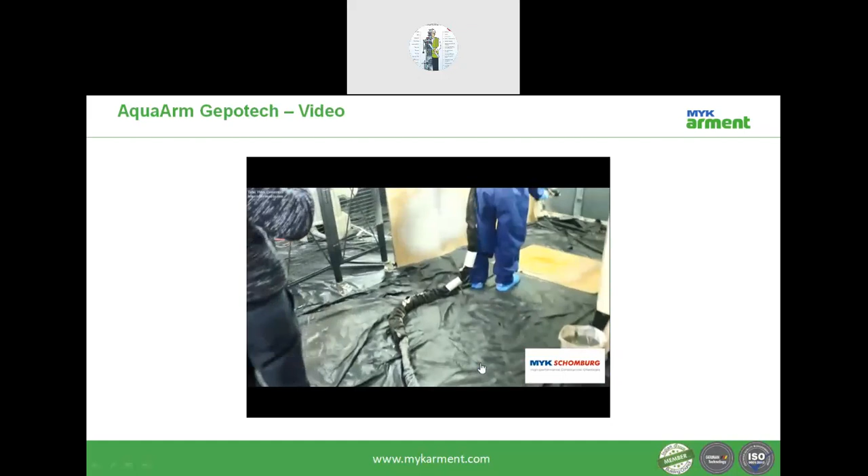So what is polyurea? Polyurea is a high performance two component system. It has a mix ratio of 1:1, and it rapid cures, setting within seconds. Once it sets within seconds, you can allow traffic within 10 to 15 minutes, and vehicular traffic within an hour, and then you can do any kind of application on top. It is highly waterproof, with outstanding properties. It is designed to protect various surfaces, and polyurea is a product that beats traditional coatings. This is how you can see polyurea is a much better waterproofing system. Once you spray this polyurea based system on any substrate, it sets within seconds.